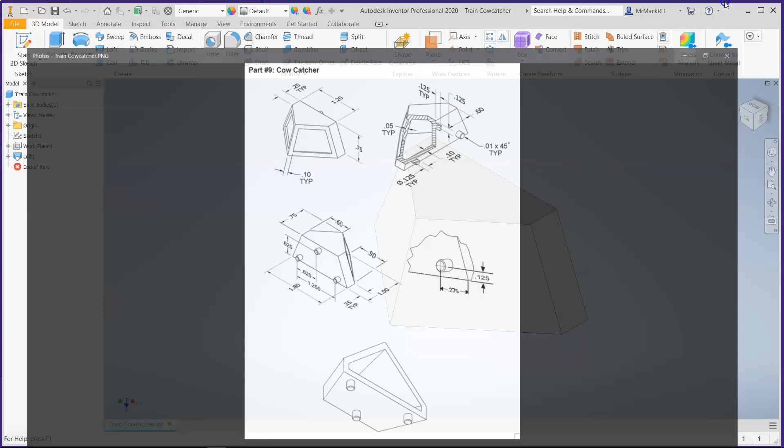Under normal circumstances in class, I would let you design your own front, your own cutouts. You can put any shape you want here. You could even type your name and do an extrusion cut to cut through the window. You could make a grill or a grate, like vertical pieces coming down and cut out pieces. You can do a lot of different things. We're just going to do a straight cut for ease and simplicity.

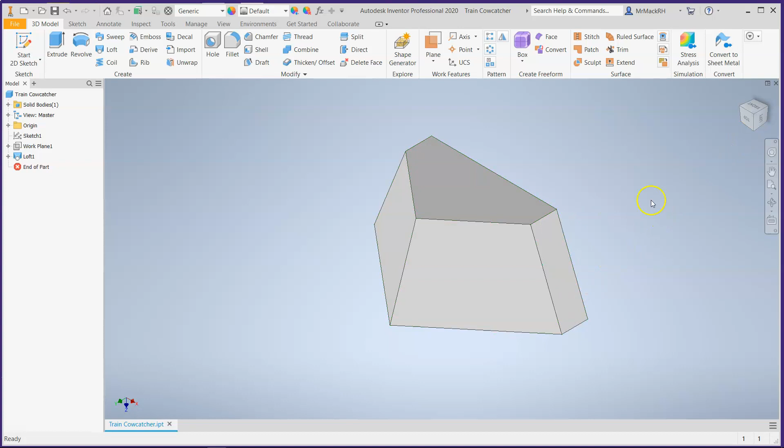So let's go ahead and do that. I've oriented my Cowcatcher so that this looks like the front, like it's coming down the tracks this way. And we want to look at this face, that's the face we want to look at. I want to see if I can rotate to get that face, sort of. Yeah, that's about the best I can do.

This can be tricky in some cases, especially if something went wrong when you were creating your original sketches, and these lines, this little line here, the base, and this line here, if they aren't lined up exactly with the ones on the back, then it can cause warping in this face. And if this face is warped, you won't be able to do what I'm about to do. Now, there is a workaround for that. I can fix that. So hopefully you followed my step-by-step instructions exactly in creating this part so you don't have any issues. But I'll show you a technique that can kind of get you around that.

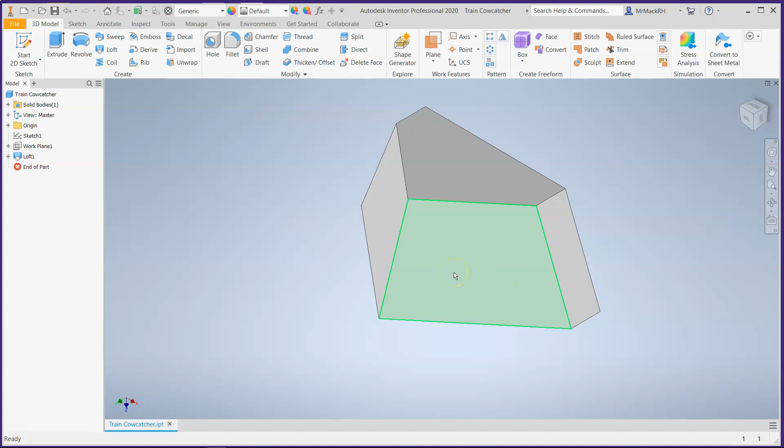On this face here, we're going to right-click, New Sketch. You'll know right now if it's going to work or not, because if you can't put a new sketch on this face, then you've got an issue with your original design, your original measurements. If you can put a new sketch here, then you're good to go. And it's a very easy cutout that we're going to do, a very easy sketch.

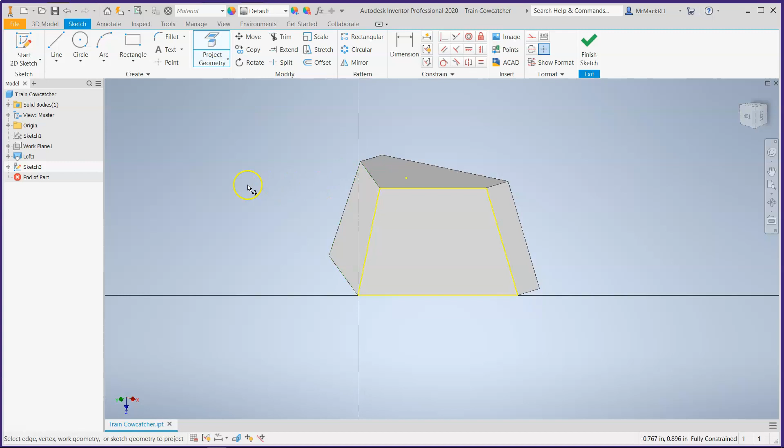First thing I'm going to do is project the geometry of this trapezoid shape. It turns yellow, that's how I know I've copied it. Now I'm going to use a new tool that you haven't used before, the Offset tool. So we're going to click on Offset. I'm going to click on it, see how it turns green when I hover over the yellow line?

I'm going to click it once, and I'm going to move inward, and it's copying the shape. So if you remember your geometry, these are called similar shapes. They have the same angles in the corners, but they don't have the same side lengths. But the lines are all going to be parallel: the tops are parallel, the bottoms are parallel, the left and the right are parallel. So the angles internally are the same, but we have different lengths.

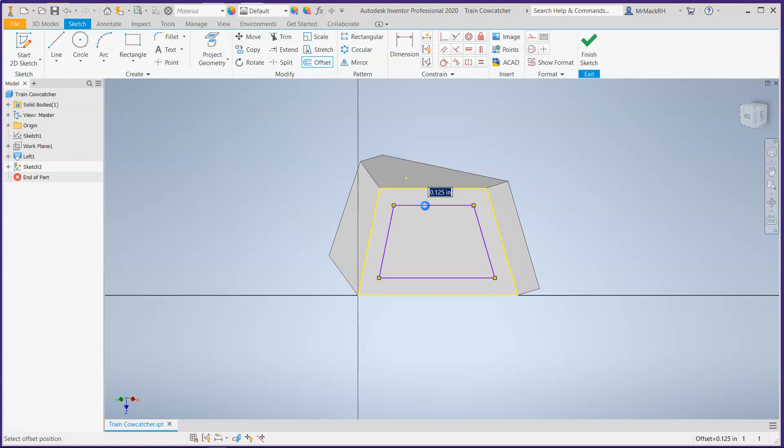So I'm going to just click it here. Now I can go back and set the dimension that I want between these two, and I just want a dimension of 0.1. So you just want 0.1, and that means it's 0.1 all the way around. And here, we can finish sketch.

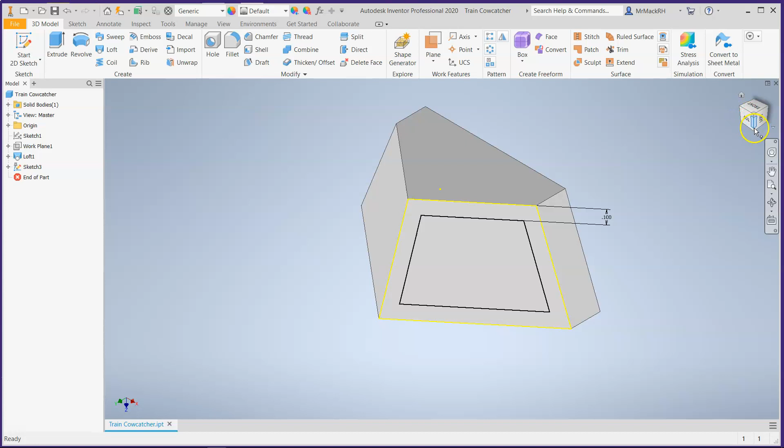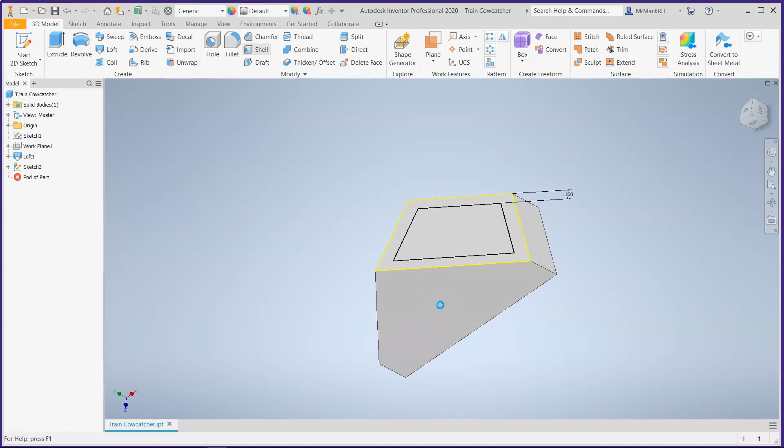First thing I'm going to do is click on Shell, and we're going to shell the inside of this Cowcatcher. We want to hollow it out. So from a manufacturing standpoint, shelling out this plastic saves money, because I'm getting rid of a lot of plastic that would normally be in a solid part.

Now it's a hollow part, saving money on plastic. Yes, this piece is now a little more flimsy and maybe a little easier to break. But depending on the material, it might not affect it much. Think about a Nerf ball, you can't break a Nerf ball, so if it were hollow inside it wouldn't matter. Same with a tennis ball, it wouldn't matter that it's hollow because of the material on the outside. So if this is hard plastic, it'll break and snap, but if it has a little flexibility, we're okay. The bottom line is we're saving money by using the shell.

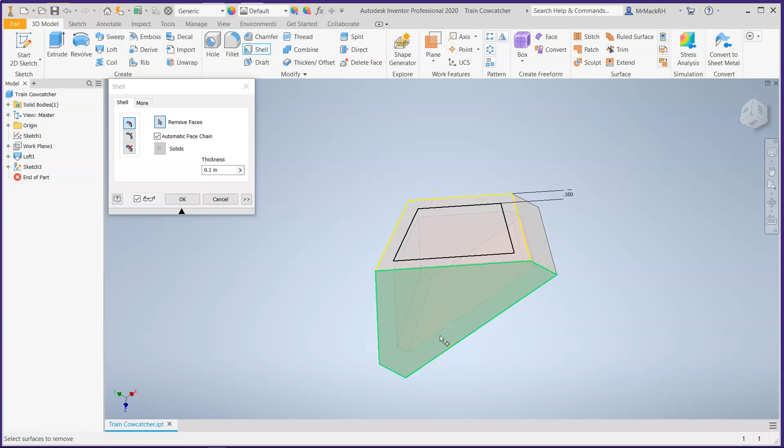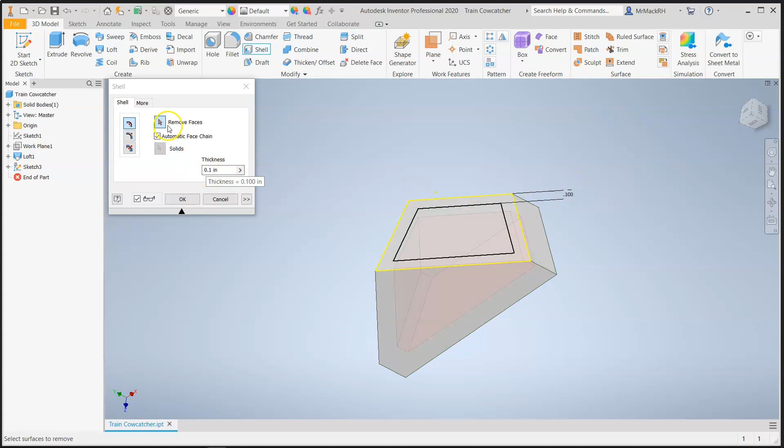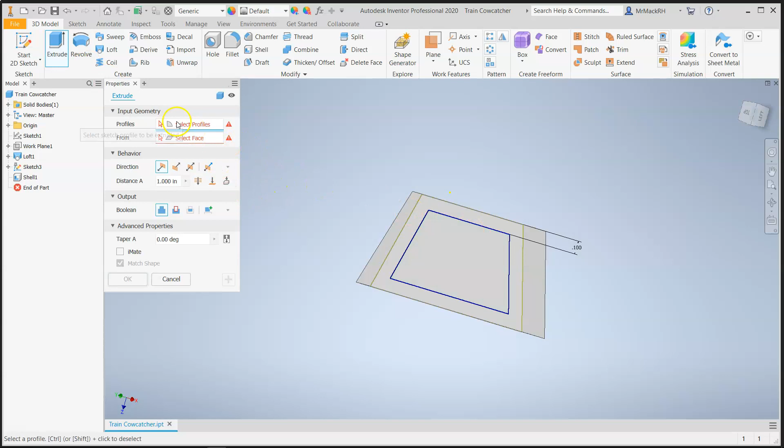Now we can cut out this window. Let's do extrude, wait a second for it to open up. Select the profile, I want to extrude this, not the whole face, just this. Now notice it's growing material outward, we want to reverse that and do a cut. But look what it's doing.

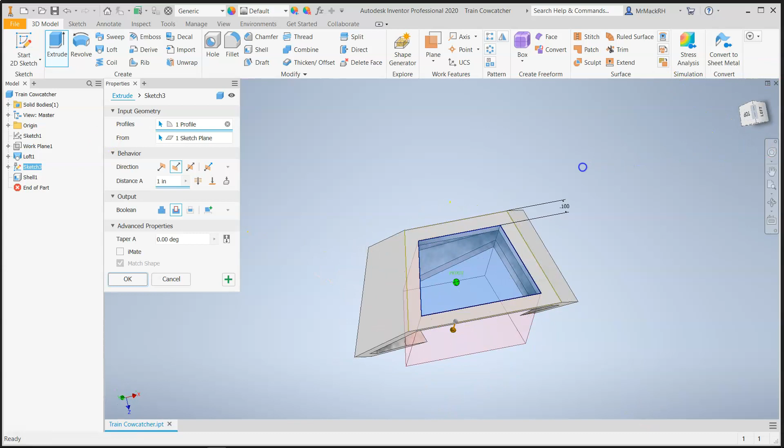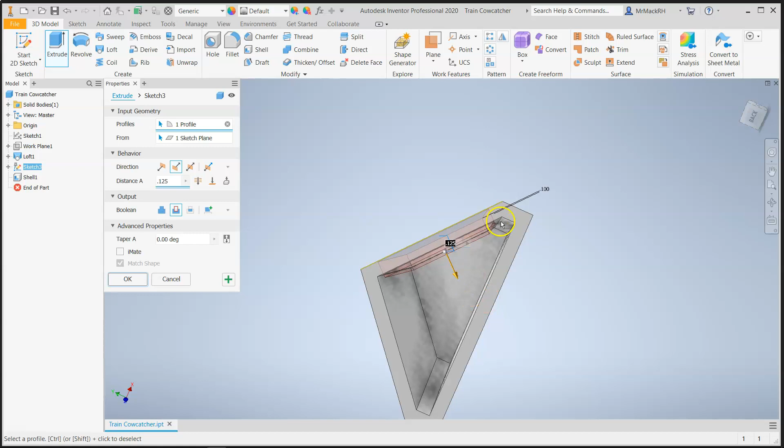It's cutting all the way through the part because it's set to cut 1 inch. If we recall how thick we just made our shell, that's all we have to cut through, the shell. I may do 0.125 just to make sure it goes all the way through, but you don't want it to go all the way to the back. So as long as it cuts through and stops before you get interference over here, you're fine. You could say 0.1 or 0.125 just to make sure it goes through where it's supposed to. Click OK. So we've cut one window and shelled it out.

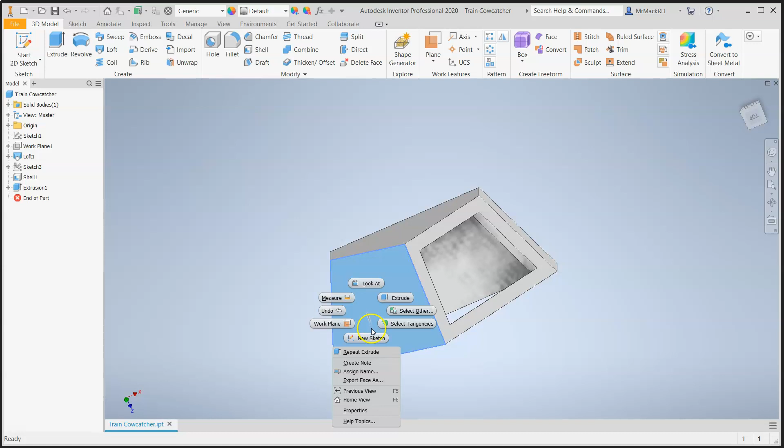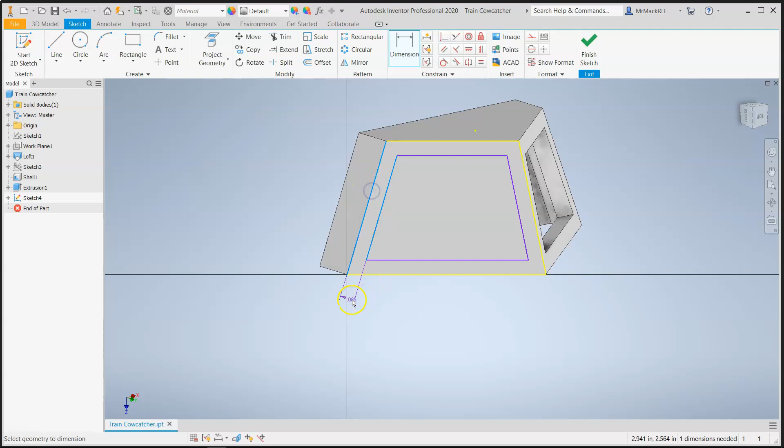Now we're going to do the same thing over here and make another window. Hover over this face, right click, new sketch. Since it lets me open a new sketch, I know I did it correctly originally, just like on the previous one. We're going to do an offset again, oh sorry, first we need to do a project geometry, then we do an offset, and we'll dimension that offset once again, doesn't matter which side you do it on, 0.1. Finish sketch. Extrude, change it to a cut, and click the trapezoid.

And those are the windows. So we've shelled it and cut out the windows. So if we look back here, we've got the shell done, we've got the windows done. The only thing left are the 3 pegs.

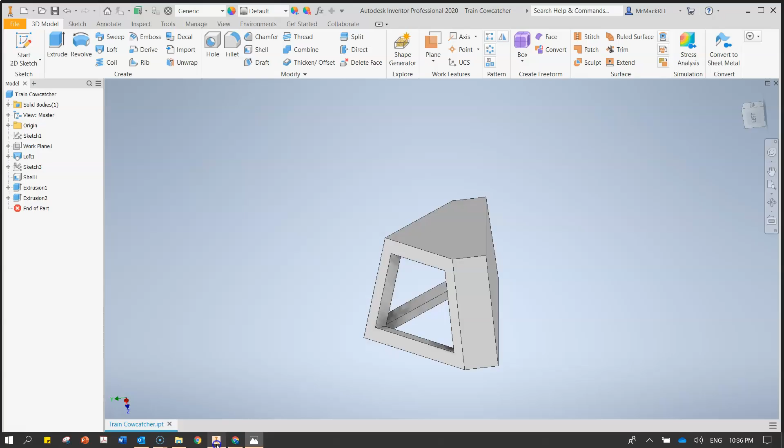So let's first decide how we're going to go about this. Let's flip it around to the back. We're going to put a new sketch on the back and draw 3 circles. Try not to get any of, see these green lines that are popping up, try not to touch those. Circle.

We can move them in place later. Circle. I'll use dimensions and set the diameter, but if I lock it to one of these lines, it's not going to let me move it. So it's important that we stay away from any of these suggestions. Inventor's a very smart program, it's very intuitive, it's trying to predict what you want. But since we're novices, not experts at this program, we want to make sure we're avoiding some of those suggestions, because undoing the suggestion is just a waste of time. So avoid them on the front end.

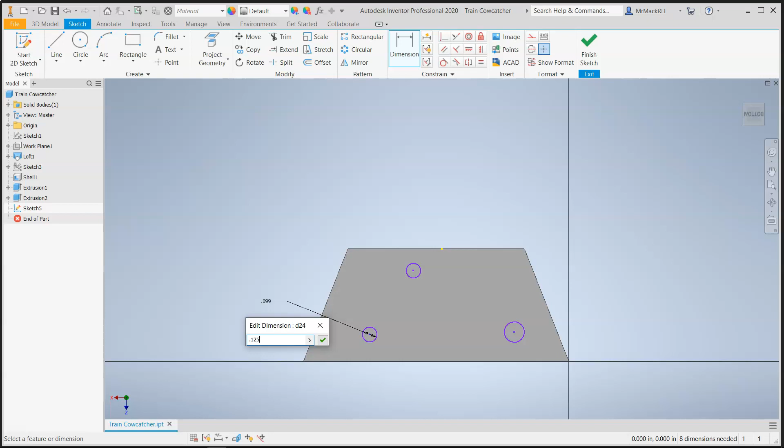Now let's talk about some dimensioning. The first thing I'm going to do, since I remember it, is dimension the diameters. 0.125 for this one, 0.125 for this one, and 0.125 for this one.

First, I'm going to grab it and slide it over a little bit, maybe that'll help. Dimension from the center—well, that's from the base. We'll start with that. So from the base is 0.125, so it should be 0.125 vertically. And then dimension from the corner there, we go, 0.275.

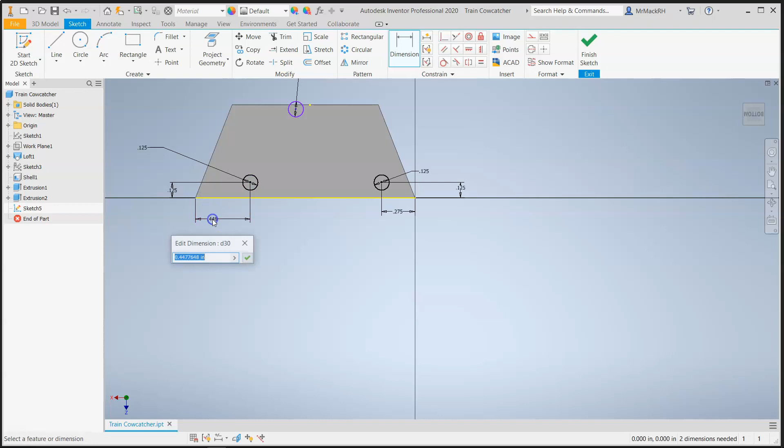I'm going to hit escape and drag that number down there, that looks a little bit better. So we have a vertical distance of 0.125 and a horizontal distance from this corner of 0.275. Let's do the same thing over here. Do our vertical distance first, 0.125, and then do our horizontal distance, 0.275.

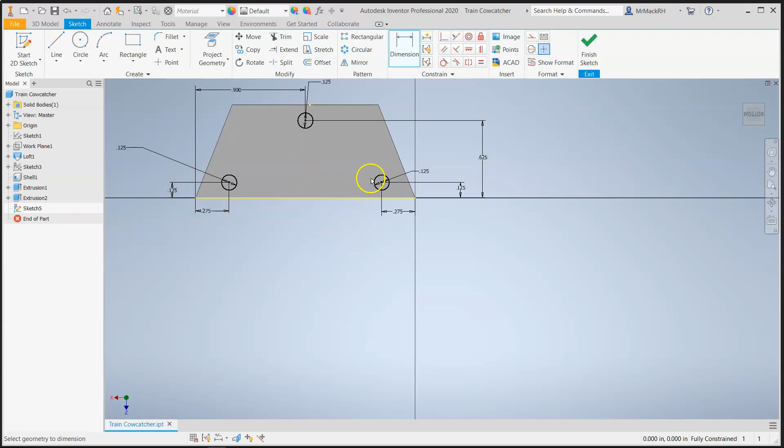And then finally, we want to do a vertical distance here of, looks like from here, 0.625, and it should be centered. It looks like they made the math more complicated. Let's do this—this is 0.625 vertically. And if we know this bottom long line was 1.8, then what is the distance from either corner? 0.9. Those are the placements for the 3 pegs.

So we're going to finish that sketch. We have placed them using X and Y coordinates.

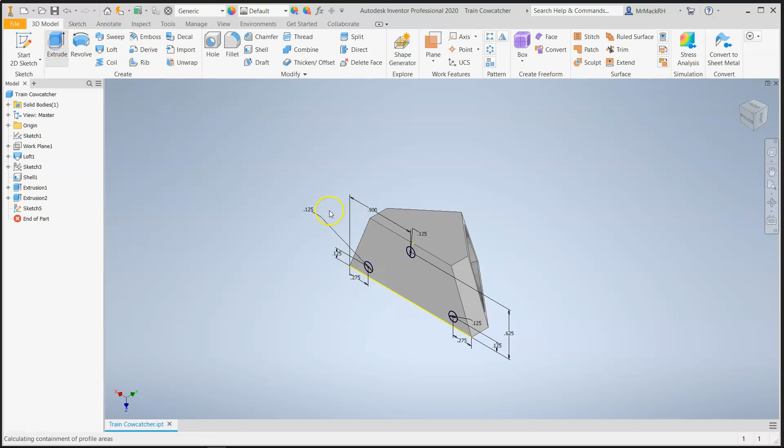Now we need to extrude, with an extrusion thickness of 0.125. So we go to extrude, and we make sure we click in all 3 at the same time, and make sure that's set at 0.125. It is. Click OK. Almost there.

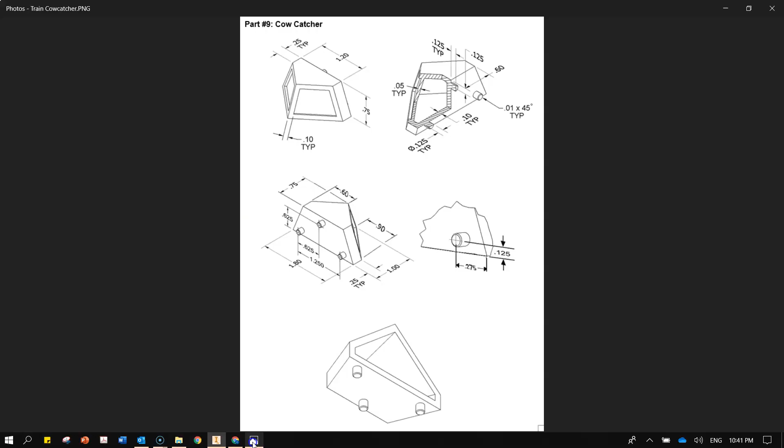The last thing is we're going to put a chamfer. So go to chamfer. Let's see what kind of chamfer it was—0.01, 45 degrees. So switch to the middle chamfer button. Our distance is 0.01, 45 degrees. Click on a face, so that face, and then click on an edge, that edge. That's what we want. Apply.

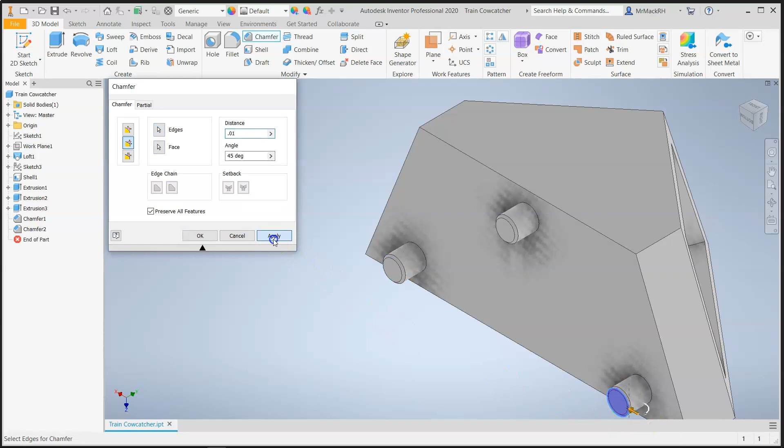Now we do have to do that separately for each, but it's already set up for us: face, edge, apply, face, edge, apply. And that is the Cowcatcher. Try and rotate it around—this is what it'll look like on your drawing sheet, that's the isometric view that we want.

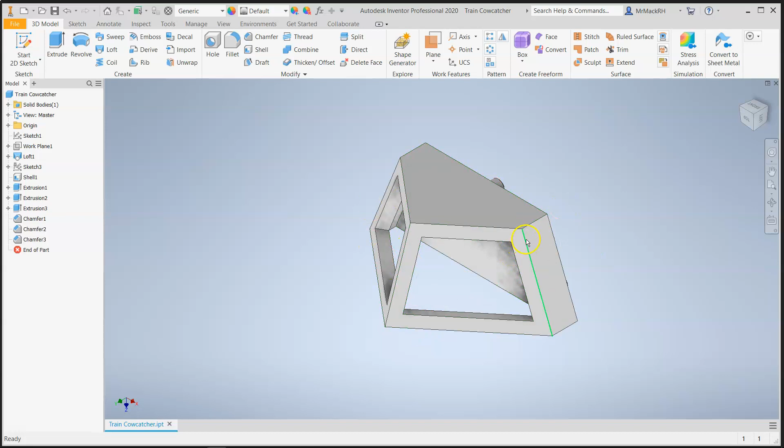Now, if this is the isometric view that we want, here's a little known fact: then this is the front. Now, I would argue that this could be the front because of the pegs, but here we also see there's windows, so we're going to leave this as the front.

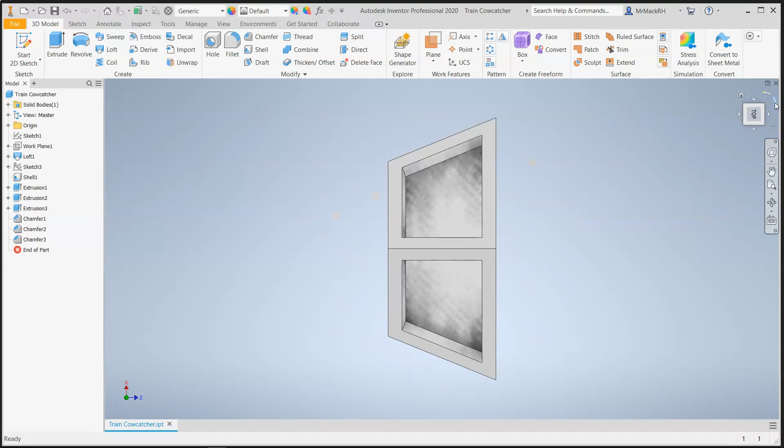Now, here's what you need to do—this is something we haven't done before. Rotate it and make sure you click in the middle of the face to get this view. If it's upside down, use these arrows here to rotate 90 degrees until you get to here. Hover over the house, right click, set current view as front.

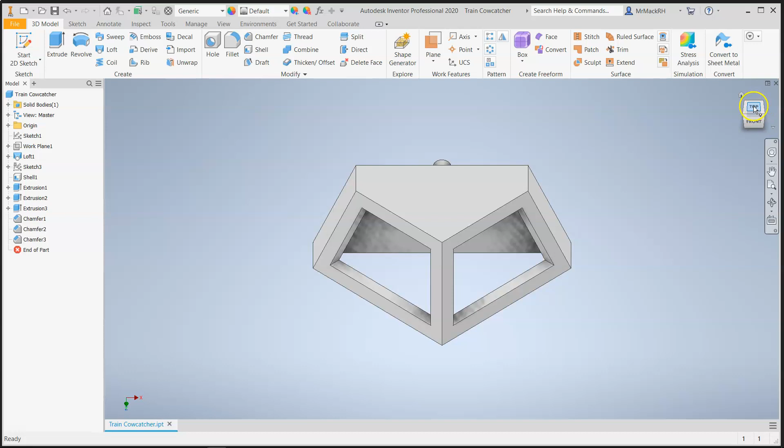Now when we click the upper right corner, that's the isometric view we want, and look, it's already relabeled our cube—there's the top, there's the bottom. So now this is what we want, so we're going to save this. You've already saved it as Cowcatcher from before, I believe, so we're going to bring this, now we're going to save that. And that's the end of the construction of the Cowcatcher.

The next video will be for the drawing sheet, and it's going to be a little complicated.